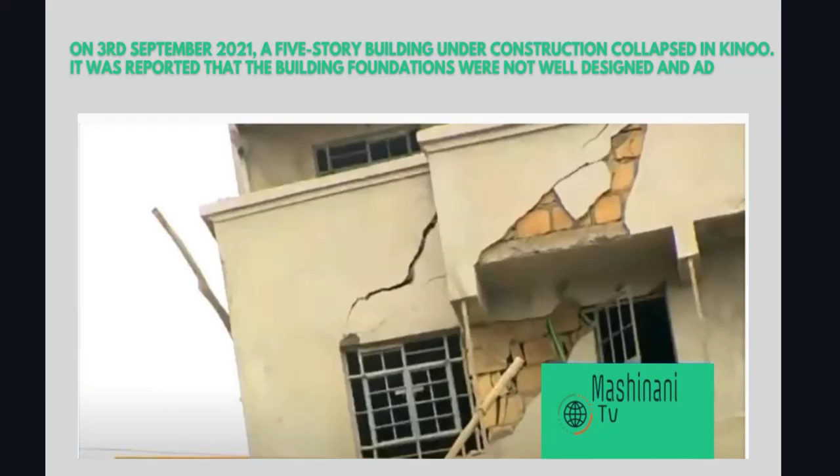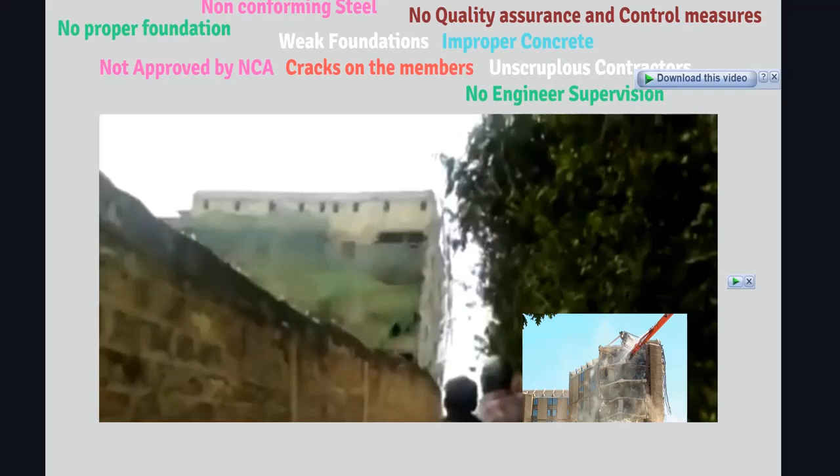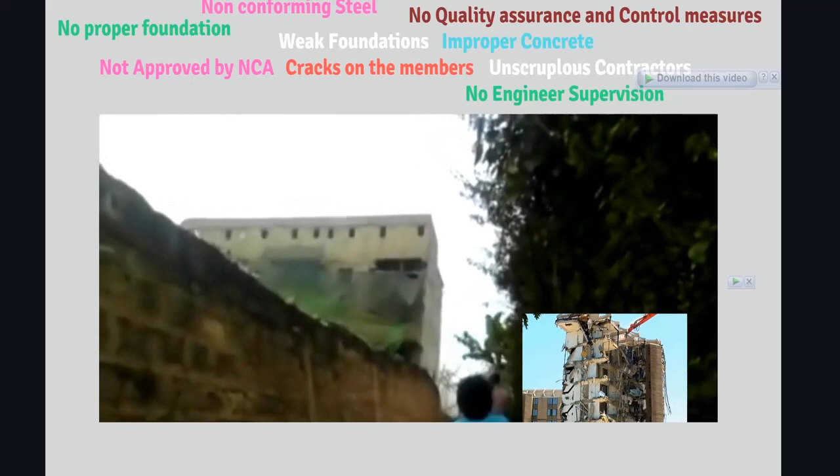That the 5-story residential building under construction, which collapsed, has no proper foundation and was not approved by the National Construction Authority. Experts and engineers who visited the site said that the building crumbled because it stands on a weak foundation. The building developed cracks before sinking in the early hours of Friday. No one was injured as masons who were at the site escaped unhurt. Plans are underway to demolish the building, with tenants who live close advised to stay away until further notice.

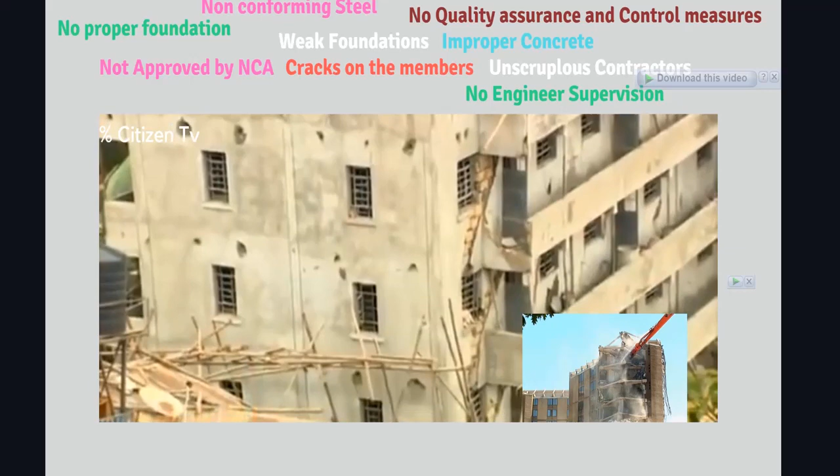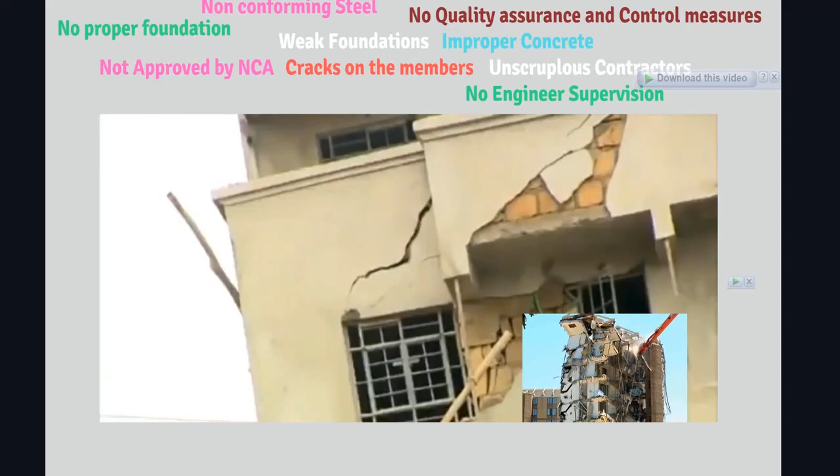The incident coming just 3 days after another building collapsed in Kihara, Gachie, a few kilometers from Kinoo. Experts have linked the rampant collapse of buildings to greedy developers dodging approvals from authorities. The project was not approved by the National Construction Authority. From the information we have, there was no site engineer, there was no site supervisor, so you wonder how the work was going on. Well, that is something that will be investigated by the police and the National Construction Authority.

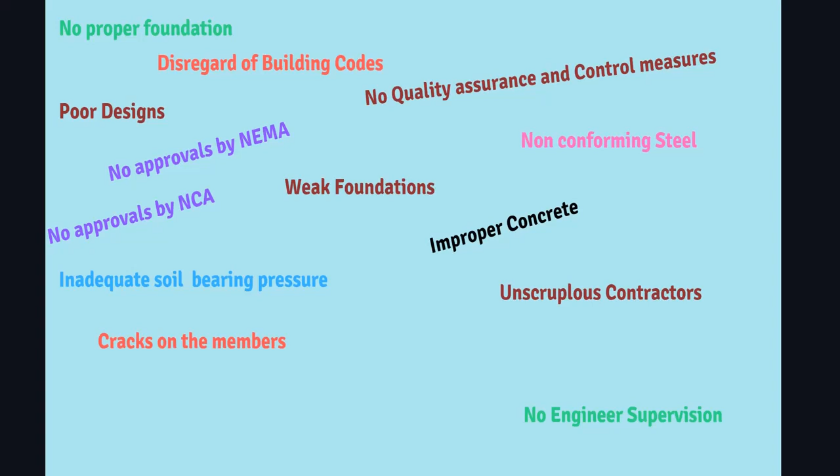Why do buildings collapse? According to an engineer we interviewed for this report, the following are the most common reasons why buildings collapse. An in-depth explanation of the major factors listed a while ago is as follows. 1. Inadequate foundation sizes that cannot withstand the loading from the buildings. Most foremen have now replaced the engineers, because they charge cheaply, to provide plans used elsewhere with certain sizes of foundations which may not be adequate for the proposed building.

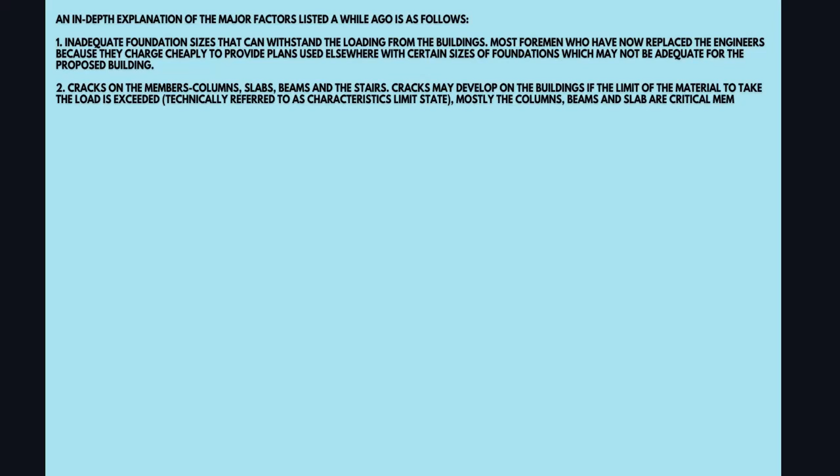2. Cracks on the members' columns, slabs, beams and the stairs. Cracks may develop on the buildings if the limit of the material to take the load is exceeded, technically referred to as characteristics limit state. Mostly the columns, beams and slab are critical members that support the frame structure of a building. Sometimes if the members are not properly cured, they may crack or fail, leading to the collapse of the structure.

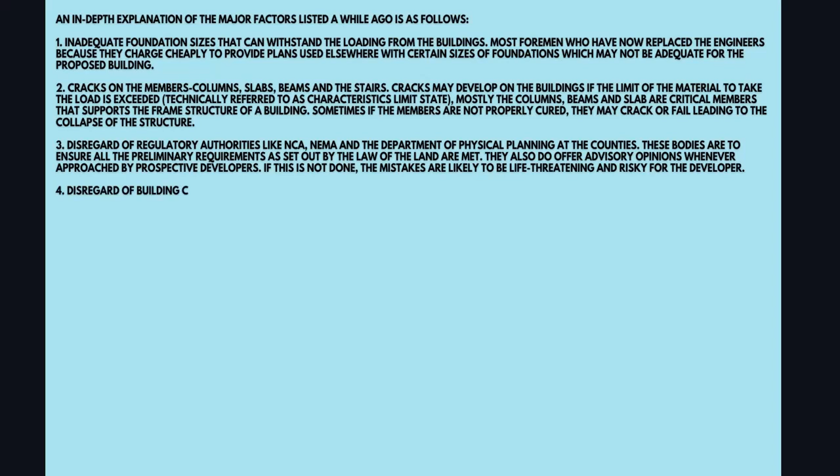3. Disregard of regulatory authorities like NCA, NEMA and the Department of Physical Planning at the counties. These bodies are to ensure all the preliminary requirements as set out by the law of the land are met. They also do offer advisory opinions whenever approached by prospective developers. If this is not done, the mistakes are likely to be life-threatening and risky for the developer. 4. Disregard of building codes and manuals during design and construction. These specify all the requirements that need to be adhered to avoid any failure of the structure.

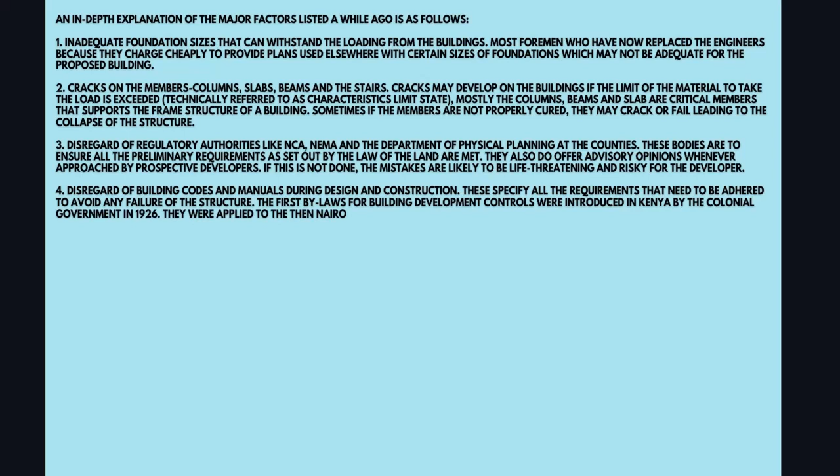The first bylaws for building development controls were introduced in Kenya by the colonial government in 1926. They were applied to the then Nairobi Town Council. These were later replaced by the Nairobi City Council bylaws, building, in 1948, that then included town planning and zoning requirements. The local government adoptive bylaws, building, Order 1968. The current code is by the National Construction Authority Act, No. 41 of 2011, the National Building Code, 2020.

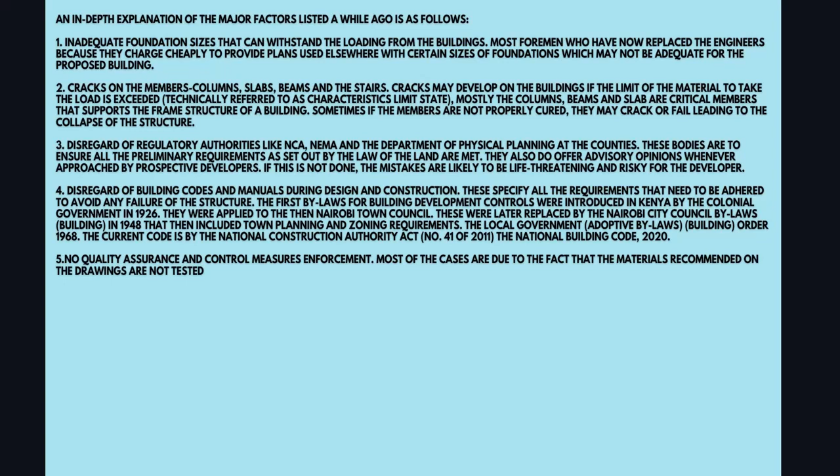5. No quality assurance and control measures enforcement. Most of the cases are due to the fact that the materials recommended on the drawings are not tested to ensure the specifications are being met during construction. 6. Lack of engineer supervision on site, who is the trained professional to assess risks and mitigate them before a tragedy happens. The engineer has a professional burden of deregistration if the building they approved the drawings for and supervised fails.

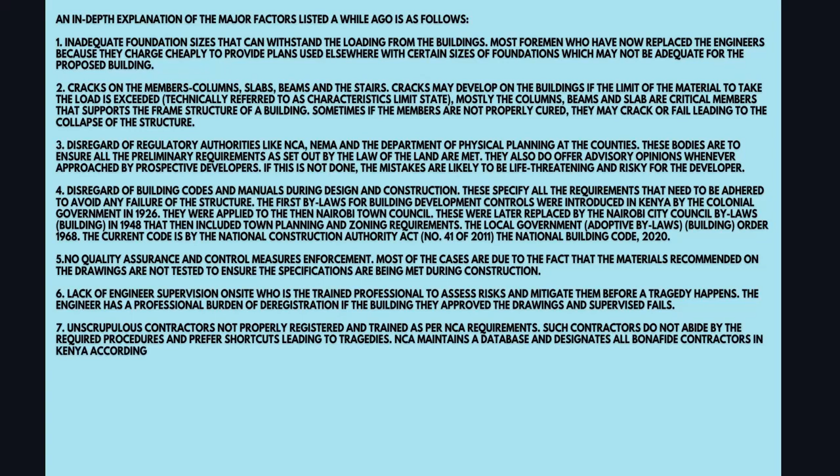7. Unscrupulous contractors not properly registered and trained as per NCA requirements. Such contractors do not abide by the required procedures and prefer shortcuts leading to tragedies. NCA maintains a database and designates all bona fide contractors in Kenya according to their capabilities financially and equipment-wise to complete projects. 8. Improper concrete, technically referred to as mix design. Different buildings according to the structural engineer's specifications would require different strength designations to withstand the loadings of the building.

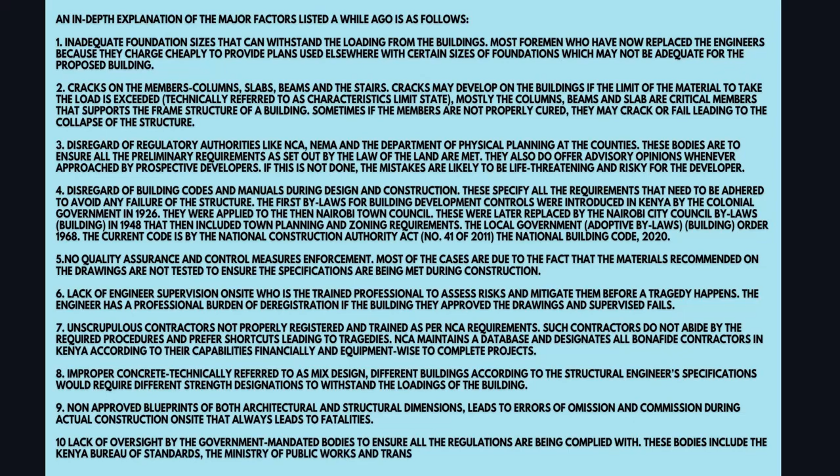9. Non-approved blueprints of both architectural and structural dimensions lead to errors of omission and commission during actual construction on-site that always lead to fatalities. 10. Lack of oversight by the government-mandated bodies to ensure all the regulations are being complied with. These bodies include the Kenya Bureau of Standards, the Ministry of Public Works and Transport, and the inspectorate officials from the counties.

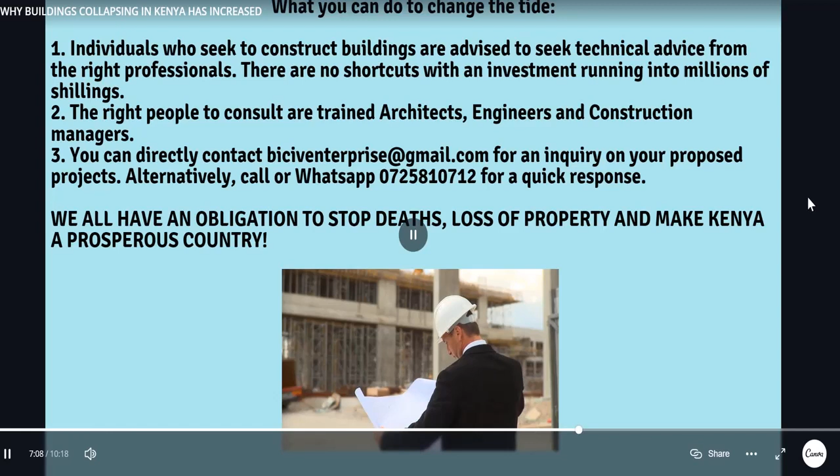What you can do to change the tide. 1. Individuals who seek to construct buildings are advised to seek technical advice from the right professionals. There are no shortcuts with an investment running into millions of shillings. 2. The right people to consult are trained architects, engineers and construction managers.